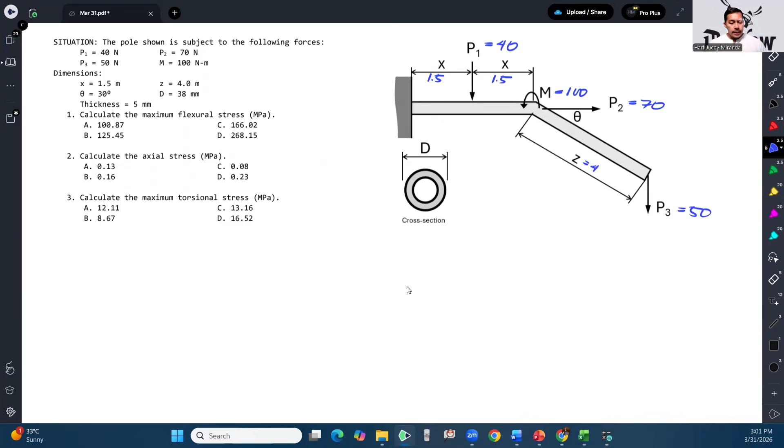The cross-section of the pole is hollow. We are given the outer diameter of 38 mm, and the thickness here is given to be 5 mm.

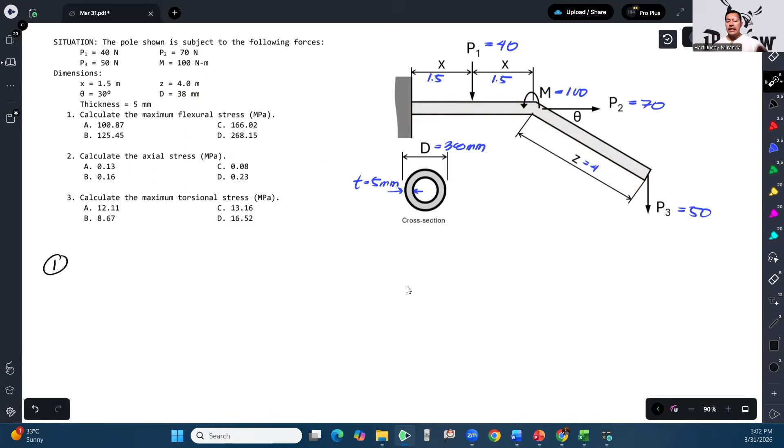So the first question, number 1: calculate the maximum flexural stress. To get the maximum flexural stress, we need to know where the maximum moment is. Although the structure looks a bit weird because it's bent.

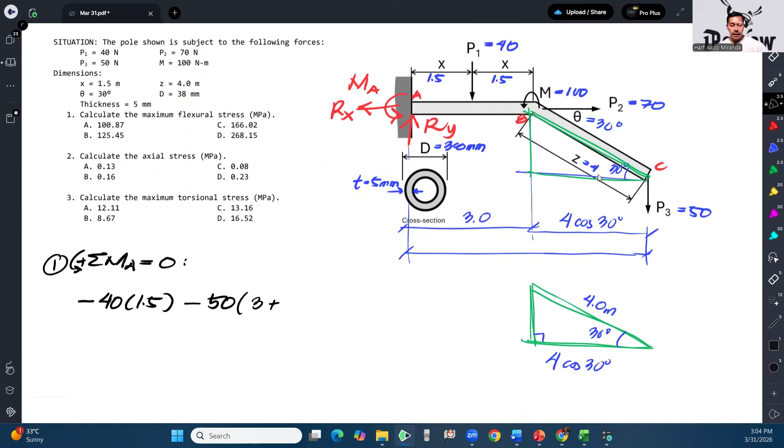So the moment arm for the 50 Newton force would be 3 plus 4 cosine of 30. And then moment MA, counterclockwise. You can notice there's a moment applied here - that's a bit confusing. But this moment is actually a torsional or twisting moment. So it's not included in the moment at A, because it twists the pole - its moment is about this axis.

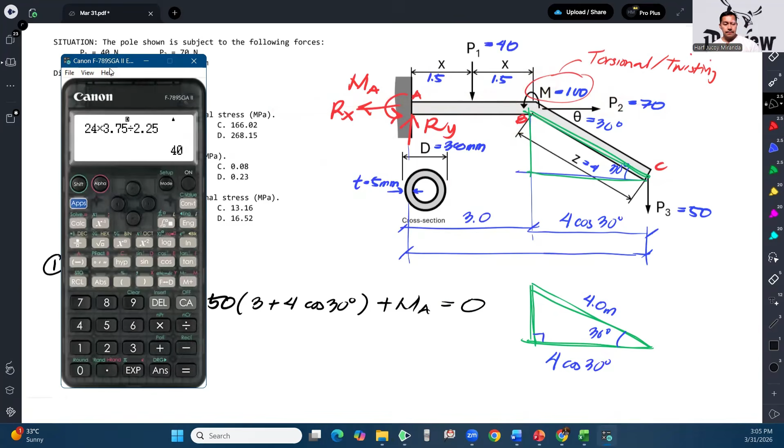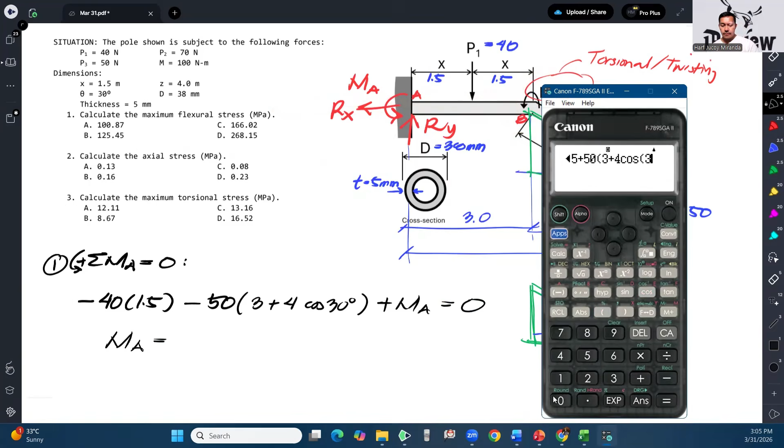So it's not included. Summation equals 0. From there, we can solve for the moment at A, and that gives us 383.205 Newton-meter.

Now that we have the moment, we can calculate the flexural stress on the section. So this is our hollow section - let me add the dimensions now. This is 38, and this is 5, so it becomes 28.

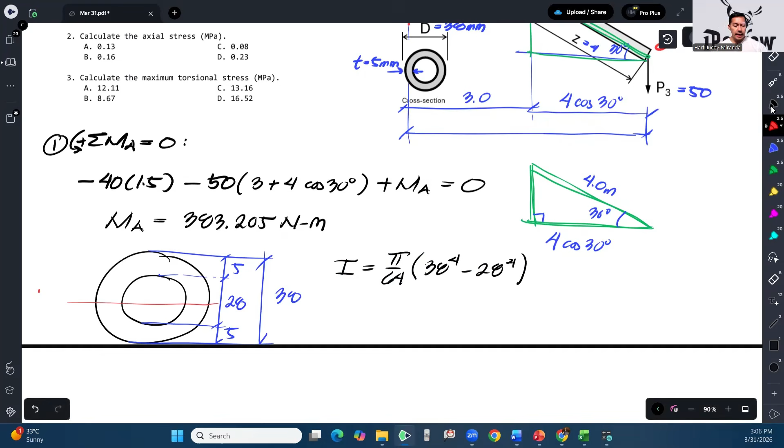Because 38 minus 10 gives the inner diameter. So the moment of inertia is pi over 64 times outer diameter to the fourth minus inner diameter to the fourth. Then our C, for MC over I - since this is the neutral axis, the maximum flexural stress occurs at the extreme fiber, either at the top or the bottom. That's our C, which is 38 over 2.

So our bending stress would be MC over I. Our M is 383.205 - be careful since we're in meters, let's convert to Newton-mm times 1000, since it's Newton-meter not kilonewton. Then our C is 38 over 2, over I, which is pi over 64 times 38 to the fourth minus 28 to the fourth. That should give us our maximum bending stress.

And that gives us 100.87 megapascals. Our answer would be letter A.

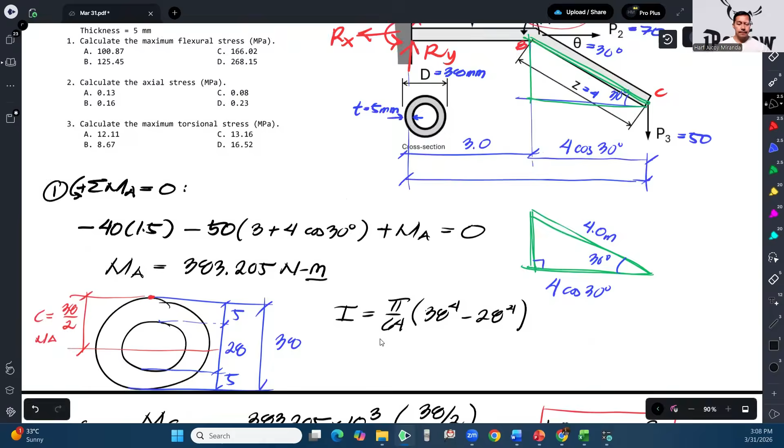Next, calculate the axial stress. The axial stress will occur in this segment, because there's a load perpendicular to this cross-section. So for number 2, axial stress would be force over area. Our force is the 70 Newton, divided by the area of this hollow circle.

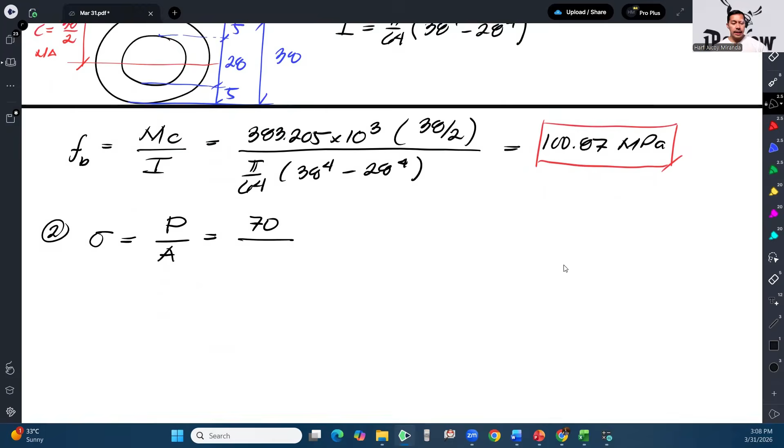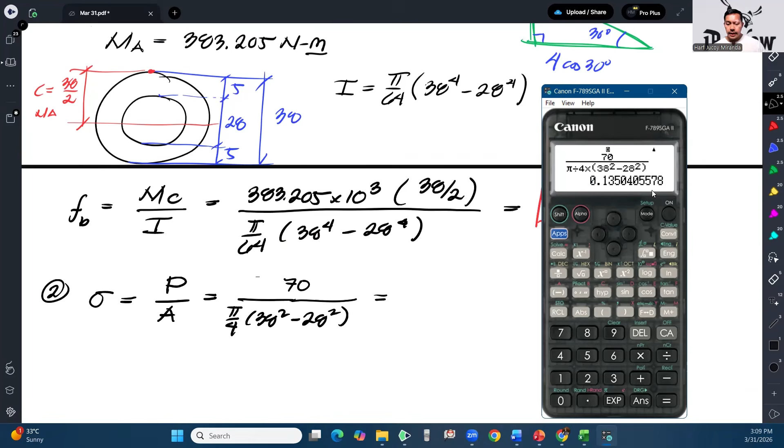So pi over 4 times 38 squared minus 28 squared. That gives us 0.135 megapascals. So our answer here is letter E.

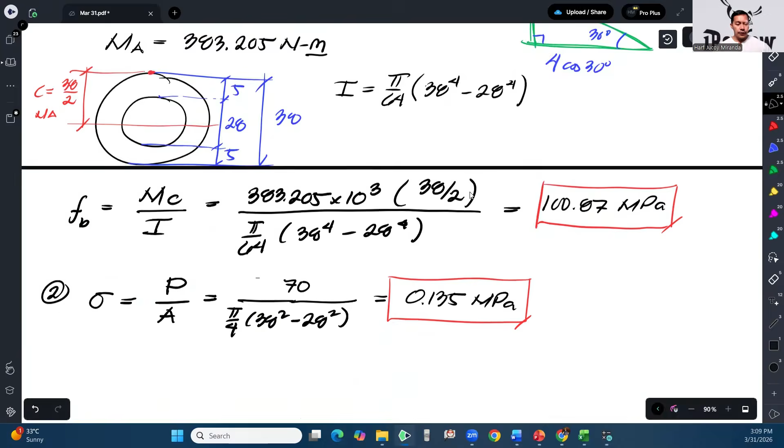Lastly, for number 3, calculate the maximum torsional stress. There's only one torsional moment there - this one. It occurs in this segment. The magnitude is 100 Newton-meter. For number 3, the maximum torsional stress is T rho over J. Our T is 100 Newton-meter - I'll multiply by 1000 to convert to Newton-mm.

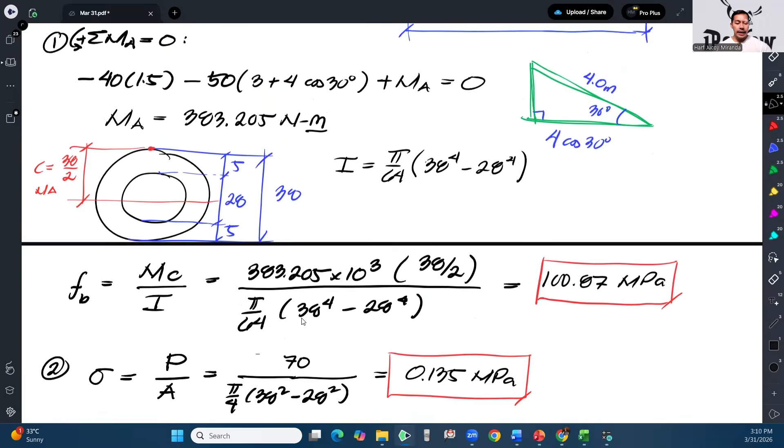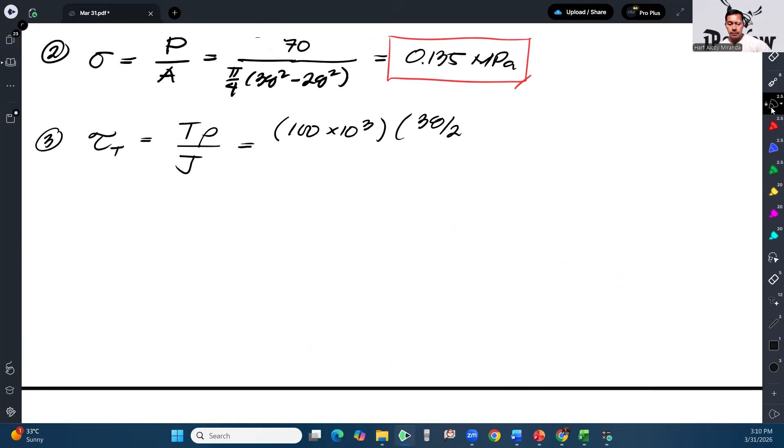Our rho - again, the maximum shear stress occurs at the outermost fiber - so rho is also 38 over 2, over J. The J of a circle is pi over 32 times outer diameter to the fourth minus inner diameter to the fourth. That will give us the torsional stress.

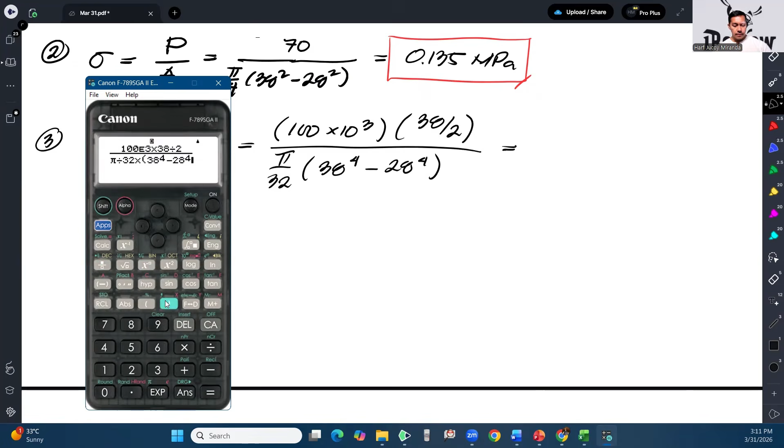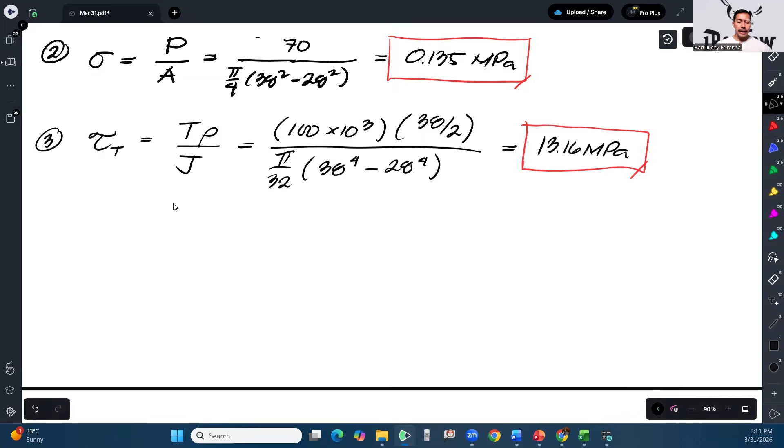That gives us 13.16 megapascals. And that's our answer for number 3. That's how we solve this problem.